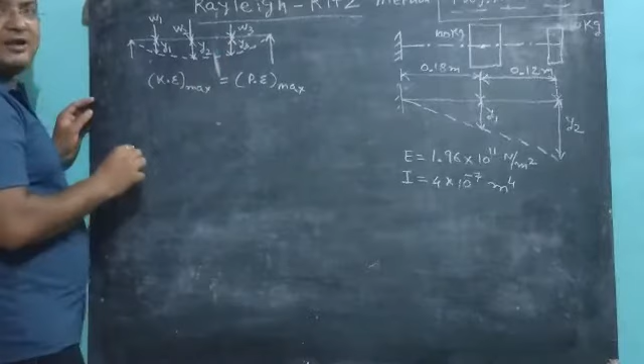So here we have 3 point loads and the deflection is y1 at point number 1, y2 at point number 2, and y3 at point number 3.

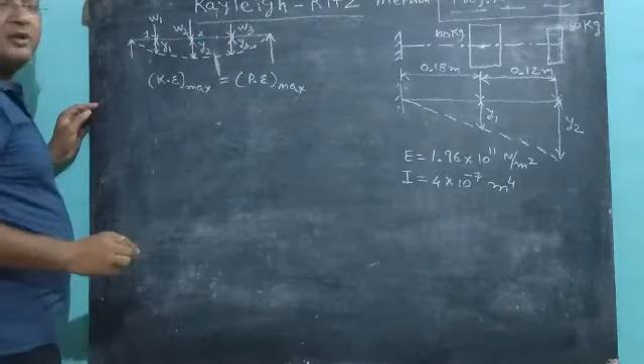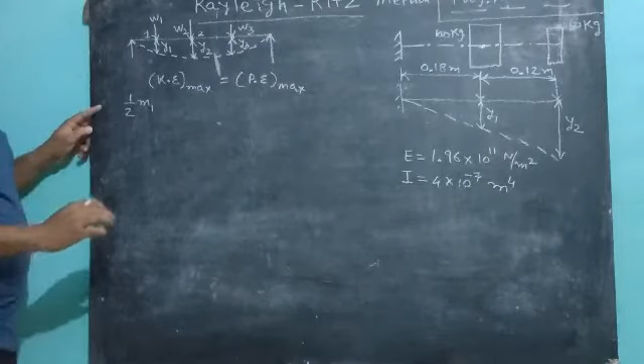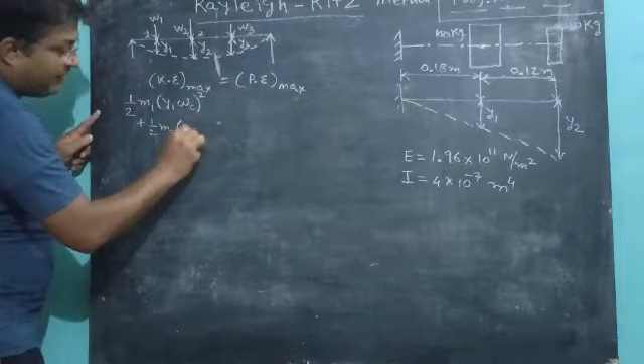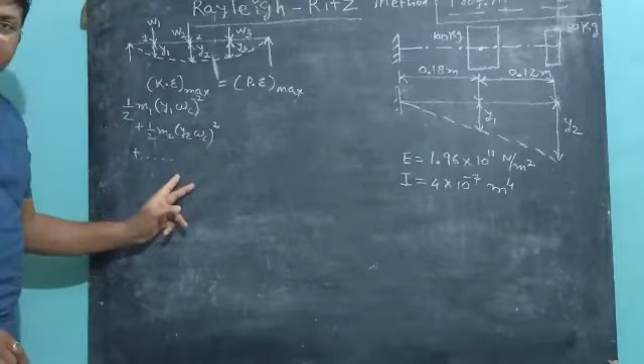Kinetic energy is half m1 into v1 square, but v equals r omega. R is y1 into omega c square, so y1 omega c, the critical angular velocity, square, plus half m2 y2 omega c square, plus likewise half m3 into bracket y3 omega c square, plus half m4 into bracket y4 omega c square.

Now the generalized equation here for kinetic energy we can write as half, it is constant so we can bring it outside, and omega c square is also constant, so sigma i equal to 1 to n, inside is m1 y1 square, m2 y2 square, m3 y3 square, likewise, so mi yi square. So the kinetic energy part is clear to us.

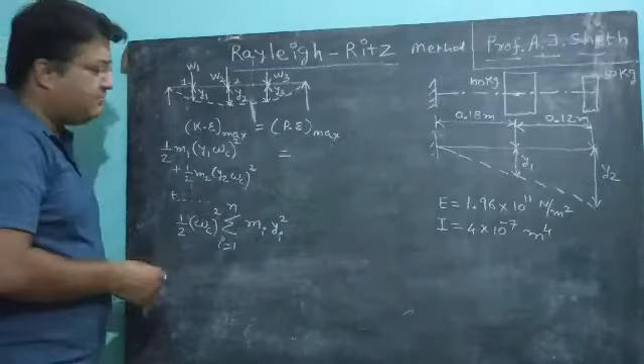Now for potential energy, the fundamental equation is mgh. Rather than using it in this form, let us use it as half into m1 g into y1 plus m2 g y2 plus likewise.

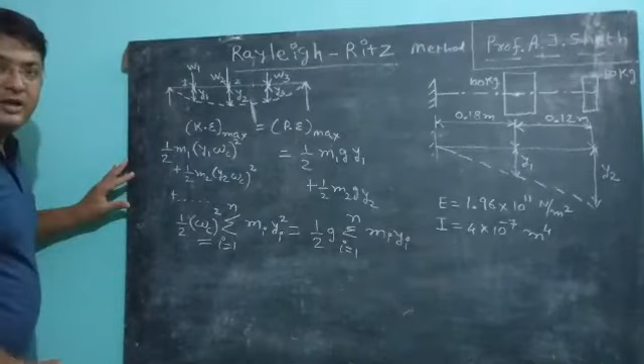So the answer, in generalized form, we can write as half g, it is outside, sigma i equal to 1 to n mass and deflection at specific location. From this we can find the critical speed or the angular velocities equation, or frequencies equation, as omega c square equals this numerator, and the remaining thing half sigma, all these things will go in the denominator.

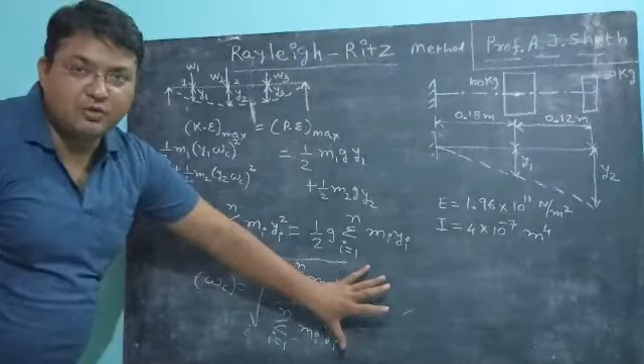And instead of square it is square root of, in numerator we have g into sigma i equal to 1 to n mi yi, and denominator part is sigma i equal to 1 to n mi yi square. So this equation is the generalized equation that we will use for multi-degree of freedom when we use Rayleigh-Ritz method.

Now for potential energy we know the equation is half k x square, or in terms of deflection, k delta square. We know that stiffness k is force upon deflection, unit deflection, and force is m into g. So instead of k I can put mg by delta. So the potential energy equation will be half mg delta square by delta, so definitely it is half mg delta.

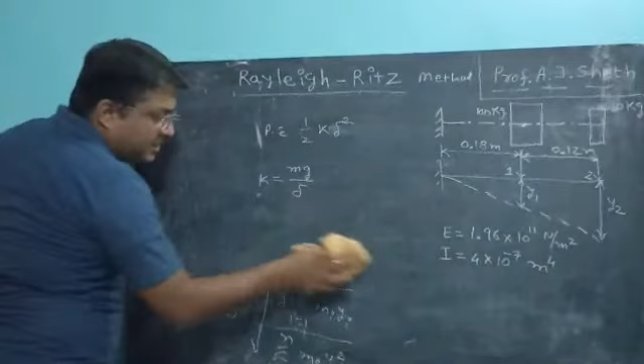The popular equation is mgh, so some of you might have this question of why 1 by 2 has been written - so this is the answer. The generalized equation for the critical speed or natural frequency of the particular system using Rayleigh-Ritz method for multi-degree of freedom cases is this one.

So I have used this case where the shaft is carrying two rotors, where the mass of one rotor is 100 kg and the second one is 50 kg. Overall length of the shaft, which is nothing but a cantilever beam or in a cantilever position, is 0.18 plus 0.12, so it is 0.3 meter, where for the first mass it is 0.18 and the second one is 0.12.

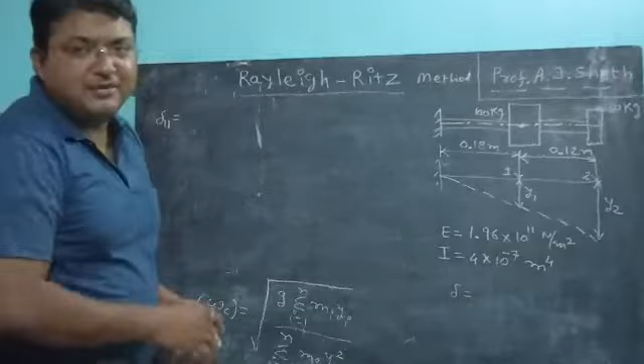We know that for cantilever beam cases, delta is normally written as WL cube by 3EI. So we will use L cube by 3EI, L cube by 3EI.

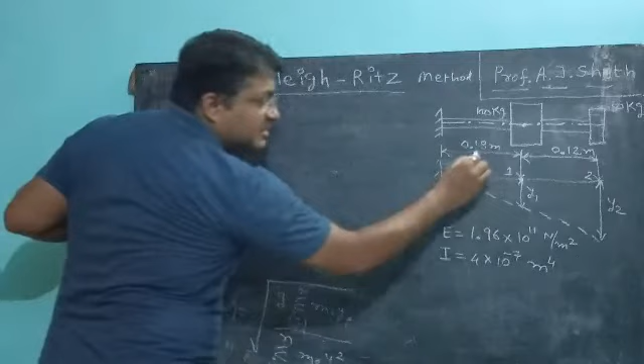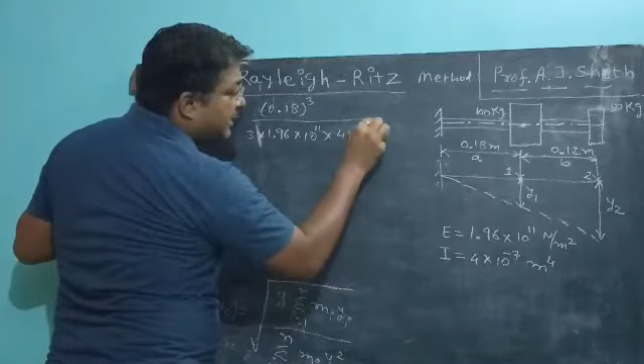So deflection at point 1 due to load at point 1, it is equal to A cube by 3EI, where this is A and this is B. A cube by 3EI. What is A? A is 0.18, cube upon 3 into E, where E is available as 1.96 into 10 power 11, and I is also given to us as 4 multiplied by 10 power minus 7. All units are in meters.

So delta 11 is available, that is 2.47 into 10 power minus 8 meter. All these values I have previously calculated.

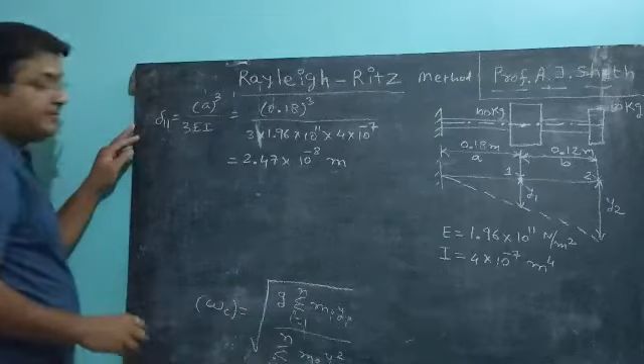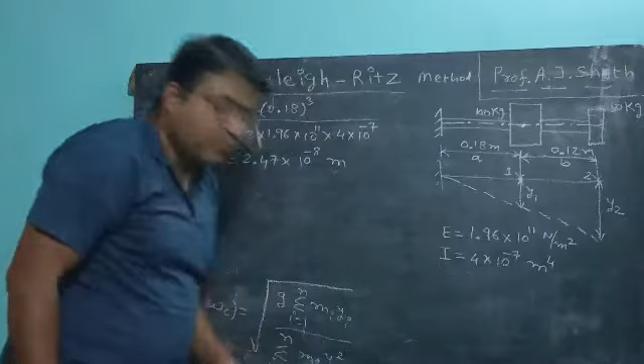Now let us find out delta 22, the deflection at point 2 due to load at point 2. Deflection at point 2 solely due to point 2, we have neglected the load at point number 1. Here the length will be the overall length, 0.3, and this length we are supposed to consider. So it is 0.3 cube divided by 3EI.

Denominator remains same, 0.3 cube. So delta 22 is 1.14 into 10 power minus 7 meter.

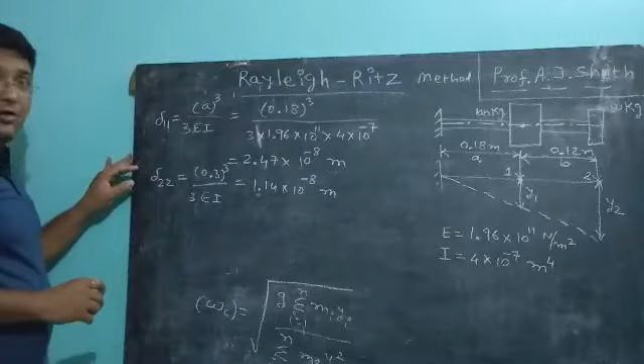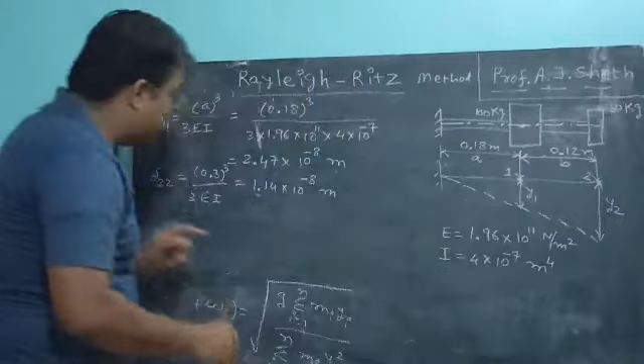Now deflection at point 1 due to load at point 2 we are supposed to calculate. Likewise, and definitely it is equal to deflection at point 2 due to load at point 1. That value is equal to A cube into, see these equations are available in strength of materials, so you can refer to strength of materials, some good author's book. So A cube into 3L minus A, the denominator is 6EI, and that value is 4.95 into 10 power minus 8 meter.

So these values are available. Now why have I calculated these? Because I need deflection y1 and y2.

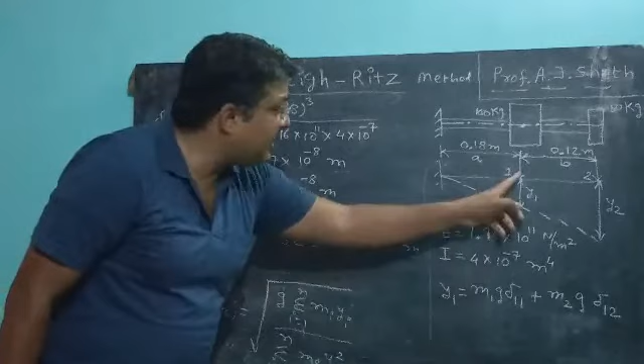So the equation for y1, this deflection, y1 is equal to mass m1 into g into delta 11, plus deflection at 1 due to point load at 2, that is because of point load at 2, m2g. Put m1 as 100 kg into 9.81 into delta 11, which is 2.47 into 10 power minus 8, plus m2 as 50 kg, 9.81, delta 12, which is 4.95 into 10 power minus 8. So we will get value y1 is equal to 0.486 into 10 power minus 4 meter.

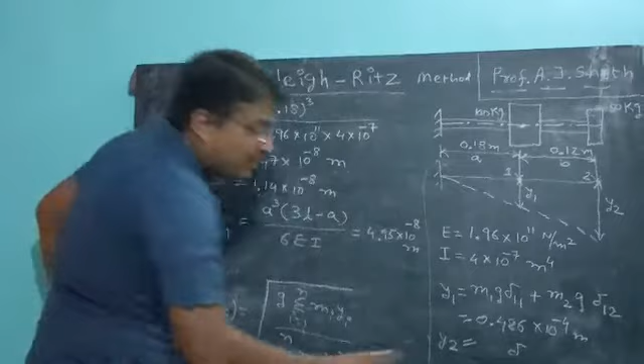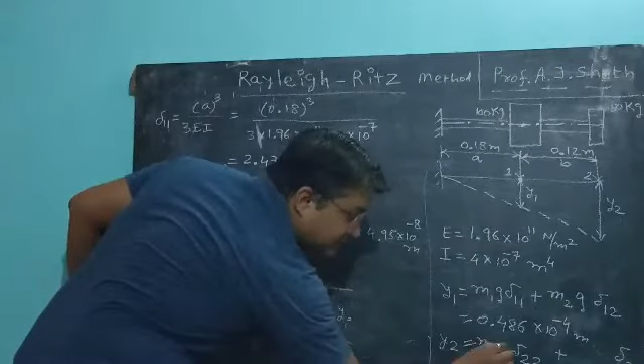Likewise, let us calculate y2. It is equal to deflection at point number 2 due to load at 2, plus deflection at point number 2 due to load at 1. Load at 2 is m2g, and load at 1 is m1g. When we put the respective values, we will get y2 in meters, definitely in 10 power minus something.

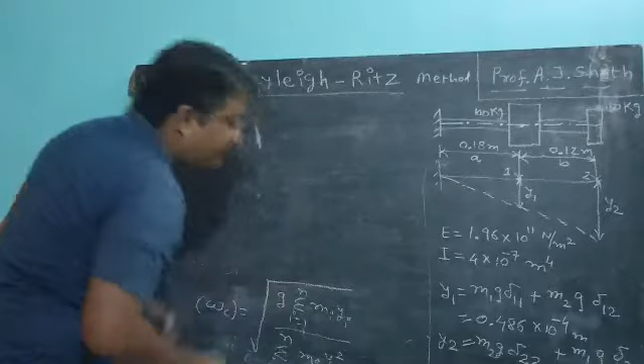When y1 and y2 are available, the final equation will be: omega c, the critical speed or critical frequency, is equal to square root of 9.81 into summation of mi yi, divided by the denominator, where m1 is 100 kg into y1, plus m2 is 50 kg into y2, which is also available to us since we have calculated it.

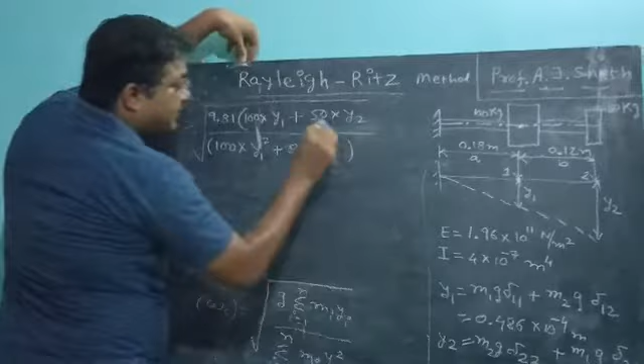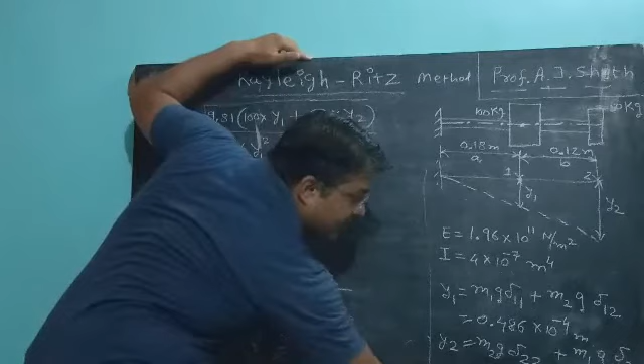Denominator is summation of mi yi square. So m1 is 100 into y1 square plus m2 is 50 into y2 square. When we solve it, see why I have written y1 and y2, because those values are available. y1 is 0.486 into 10 power minus 4, and y2 is 10.48 into 10 power minus 5 meter.

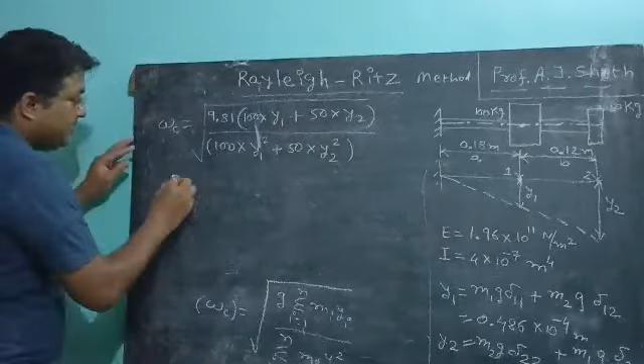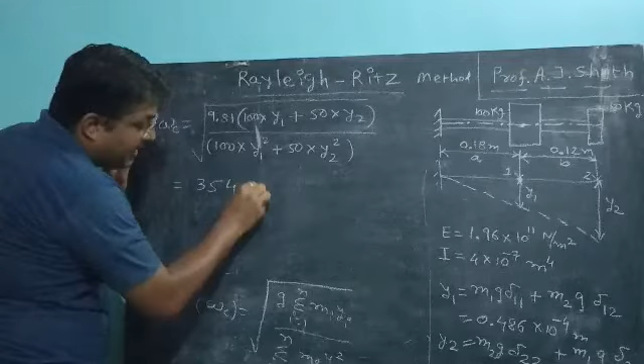When we insert these values here, we will get the critical speed or frequency. Critical speed of this particular shaft is 354.95 radian per second.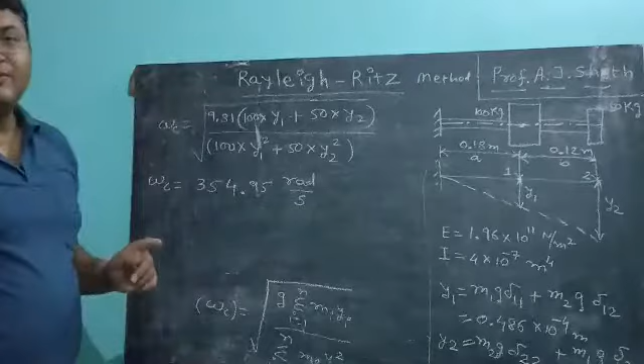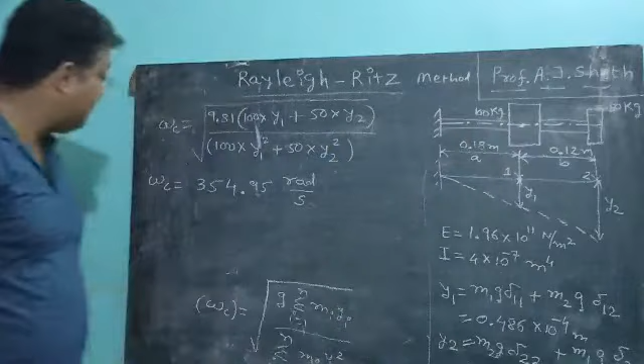It is also called the transverse frequency of this cantilever beam or cantilever shaft that carries the rotor. So with the help of this particular equation, or Rayleigh-Ritz method, you are able to solve so many problems.